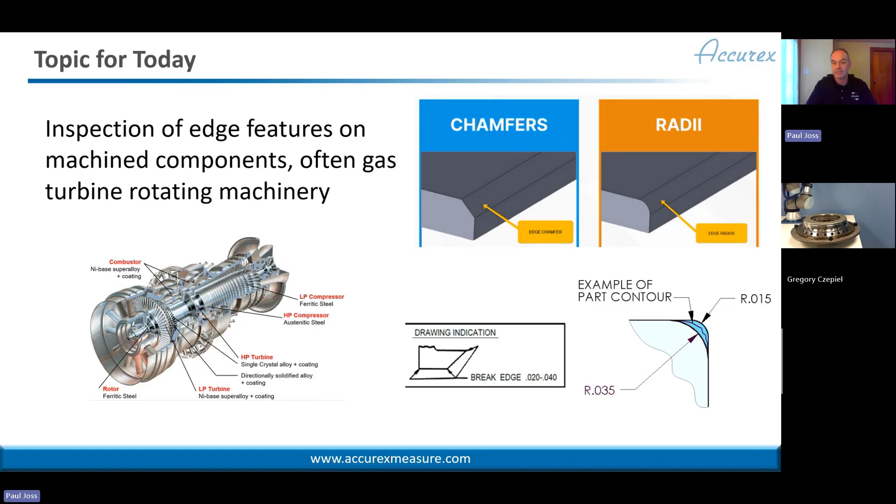And our topic today is a very specific one. We're going to look at the utilization of GapGun technology for inspecting small edge features on precision machine components, which in our world usually means the rotating components of gas turbine machinery, but not exclusively, really. Anybody who's doing precision machining that's having to do edge treatments like chamfers and radii, or even just deburring an edge to break an edge, for reducing stress concentrations and for safety and for fit and function, will find this relevant.

So that's our topic today. We're going to try to keep it tight right at 30 minutes or under, so I'll apologize in advance for talking too quickly, which I tend to do naturally anyways. But our agenda is pretty straightforward. I'm going to do a brief overview of the GapGun technology and the application. Then we're going to turn it over to Greg. He's going to demonstrate both the handheld and the automated versions of implementing our technology for this particular application, and then we're going to wrap it up with a little Q&A at the end.

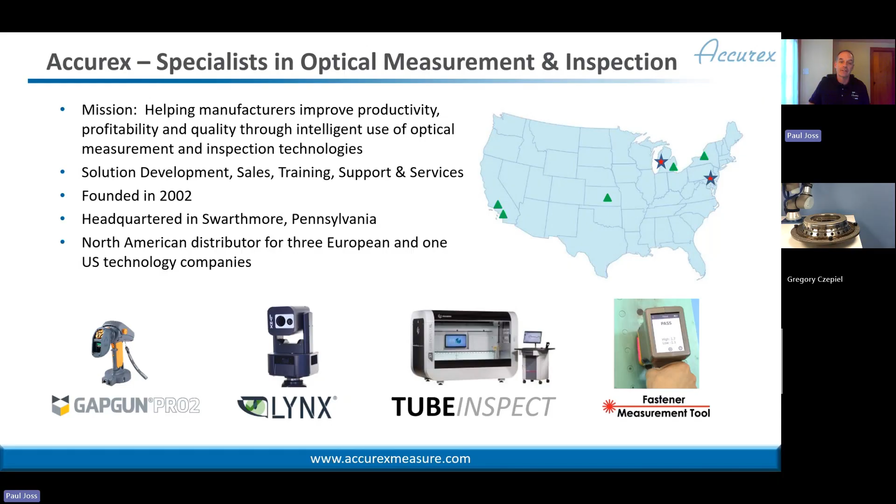We work with the Tube Inspect system, which is an optical gauge for formed tubes and wires. So people doing CNC tube bending of things like brake lines and fuel lines in aircraft or bus bars for electric vehicles. These things have to be controlled, and our tools work with that. And then we also work with the fastener measurement tool, which is really a purpose-built handheld 3D scanner focused on countersink and fastener flushness measurement, primarily on aircraft. Okay, so those are the little niches in which we operate.

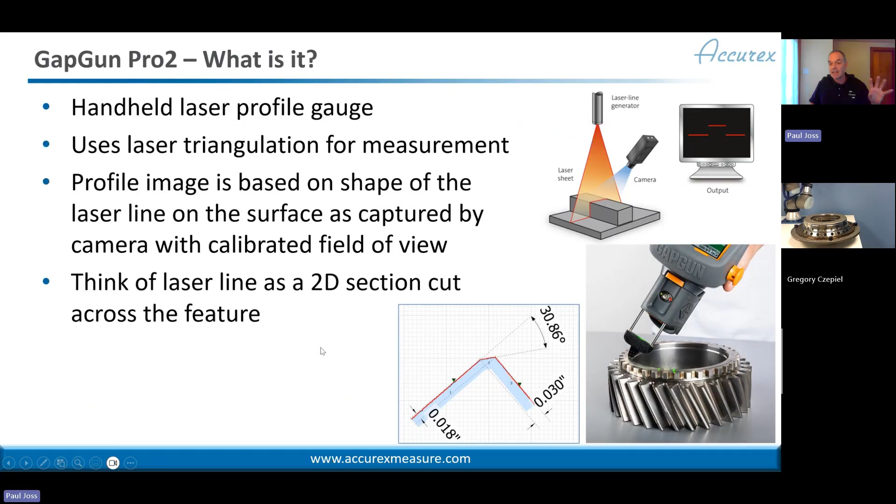So that's kind of the basic principle of the GapGun, and its reason for existing is that the GapGun is here to replace older methods of performing these types of gauging. Anybody who's producing these types of machine components and making these edge treatments has got to do some sort of control, either using hand tools or coordinate measuring machines or optical comparators, or a number of different ways. What the GapGun offers is a very fast, very accurate, super easy way of making these inspections right there on the shop floor where the production is being done.

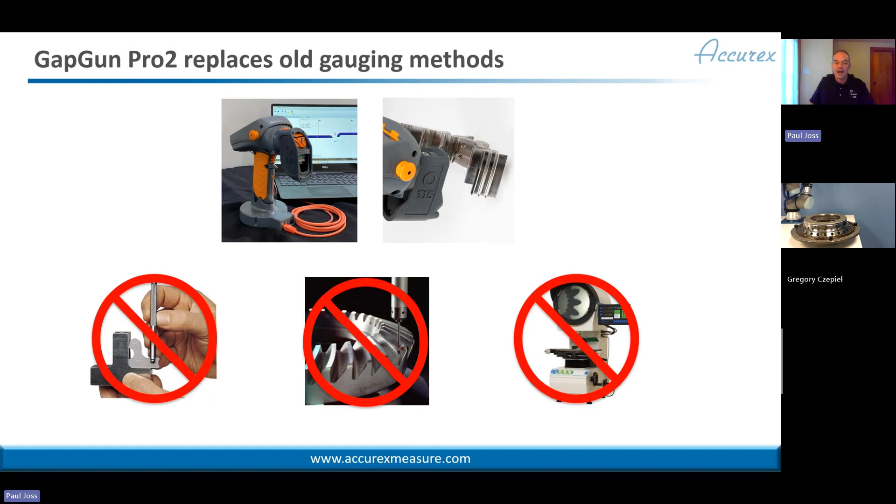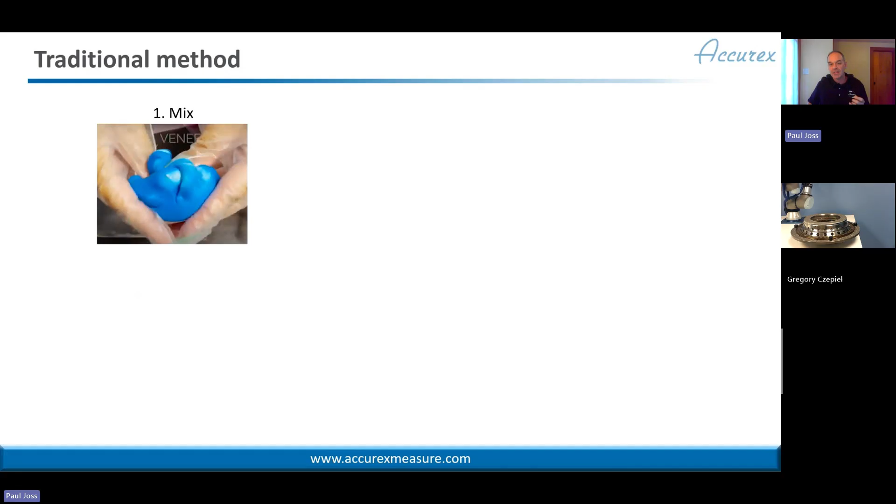So if we're not replacing these methods, we're at least offloading a tremendous amount of the work onto the GapGun to do it more efficiently. As a point of comparison, a lot of places we go into to talk about the GapGun are doing what we call the cast and compare method, where they're mixing up a compound, kind of like a repro rubber type of compound, so it'll start curing. They place it onto the features they want to measure and let it harden. Once it hardens, you peel that back off and slice it, because now it's going to represent the shape.

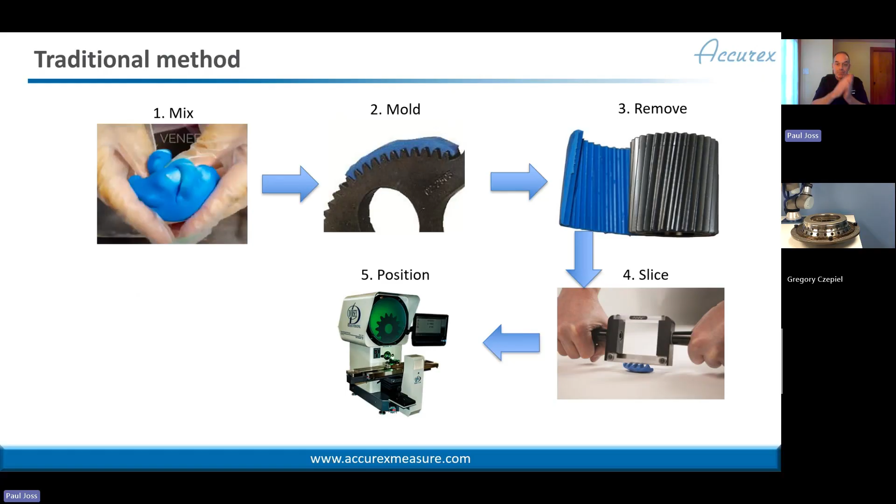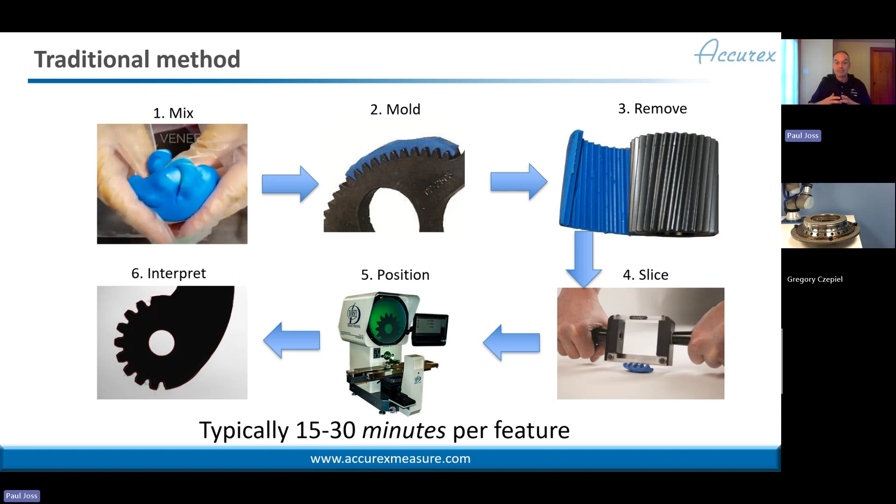You're going to slice that, take that little 2D slice, put it on an optical comparator, and on there you can extract the dimensions you want, whether it's using the software built into the optical comparator or a typical template type of approach. It's not a bad way of doing it, it's well proven, but it tends to be fairly slow. You're looking at 15 to 30 minutes per feature. And on a typical turbine disk, you're going to have dozens of things to check, so it becomes a bit of a bottleneck.

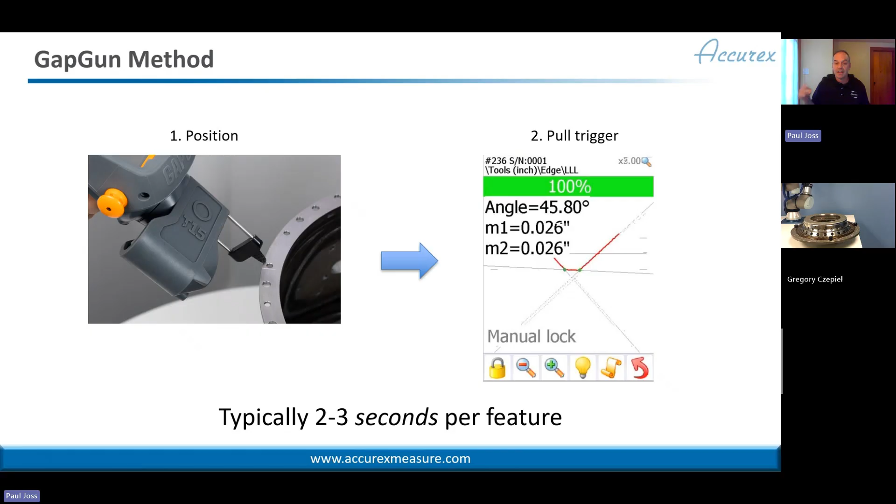GapGun turns that on its head and has a very simple two-step process for performing this inspection. You position the GapGun, you pull the trigger, and within 2 to 3 seconds, you've got your answer. In this case, we're looking at the screen of the GapGun. Right there, the operator is seeing the chamfer measurement, the leg lengths and the angle, and whether it's in tolerance or not, that quickly. So that's really what the GapGun brings to the table.

When customers are looking at transitioning from the traditional methods to the GapGun, their motivations are some combination of these 3 factors. First and foremost is usually speed. Because the GapGun is so fast, I can either do more inspections, inspect more parts or a larger number of features, or I can do the same inspections a lot faster to improve my productivity and eliminate the inspection as a bottleneck in the process. So speed is number 1.

But number 2 is confidence. The beautiful thing with the GapGun is that a lot of times in life, if you're going to do something faster, you have to trade off quality to get that speed. With the GapGun, you don't have to do that. We're measuring much faster, but we also have ways built into how we measure to ensure high confidence in those results. First, when we have this profile, we specify exactly how I want to extract the measurement. In this case, we fit a couple lines and fit a radius to the arc between those to come up with that radius measurement.

So you can specify how you want to make that measurement, so it's done the same way, no matter who pulls the trigger. Secondly, when we make a measurement with the GapGun, it's not just a single measurement. We actually pull the trigger.

We're taking multiple images, say 6 sets of images, performing that inspection independently, performing statistical analysis, and then giving you a composite, an average result of those all in those couple of seconds. So it's as if you did that optical comparator thing, say 6 times through, is what you're getting with the GapGun in just a couple of seconds.

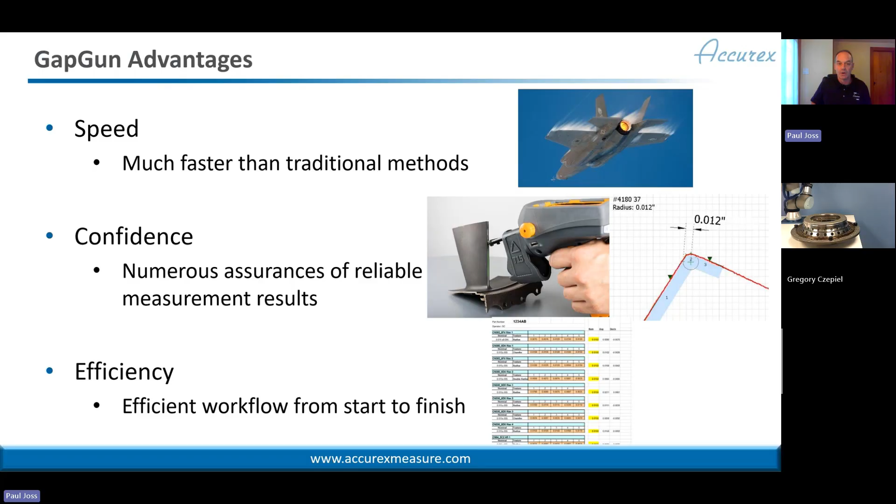And when you're finished, you can just simply transfer that data back to the host computer and put it into your ecosystem, whether that means the quality management system or Excel reports or anything like that. So that's what you get with the GapGun.

The GapGun Pro2 packaging is really, really designed to be efficient, ergonomic shop floor measurement. So it starts with the namesake pistol grip with the trigger for making the measurements. A simple pull of the trigger. This T15 sensor we have on the end is a very high resolution sensor that we've got just over a ½ stripe with over 2,000 pixels in there, where we're able to get very high resolution imaging on the features we're looking at. You can use the GapGun with the sensor attached or with the extension cable as shown here.

There's the color touchscreen interface for the user. So just everything built to make operators want to use this thing on the shop floor, and it's all done with an ISO 17025 certification. So the GapGun is coming with that out of the box, so you can be confident in the measurement results.

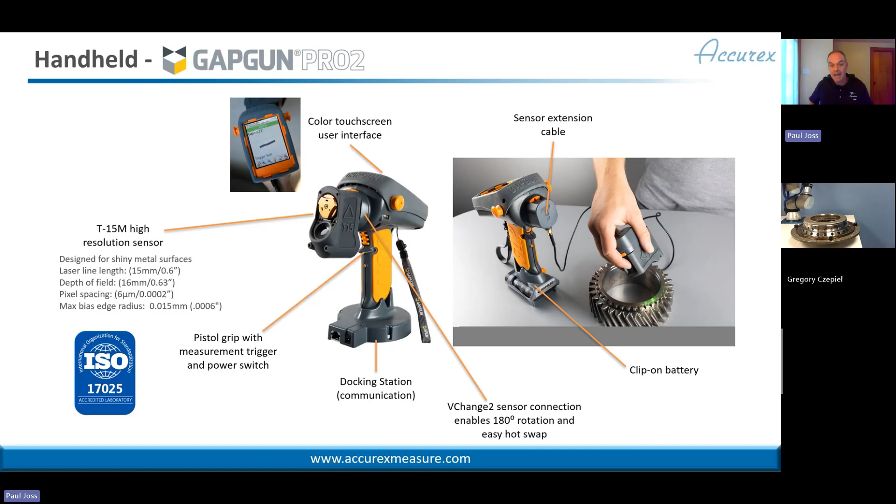When we look at automating the GapGun, we really use those same components, the same sensing, the same processing. We just have ditched the pistol grip, and we're going to mount this to a robot. So we're going to take the sensor, place it on a robot, and this is for applications where I'm going to be inspecting it at a high frequency. Maybe I've got to inspect the same part again and again all day long. Or maybe I've just got the tightest tolerance. I want to make sure I'm getting the highest level of repeatability.

So that's what the Vectro entails. We just automate the process. The measurement itself is the same, but running it is as simple as hit the button and tell what to inspect, and the robot will do the work. We've got plugins for both FANUC and UR cobots, and it can also be integrated with just traditional industrial robots.

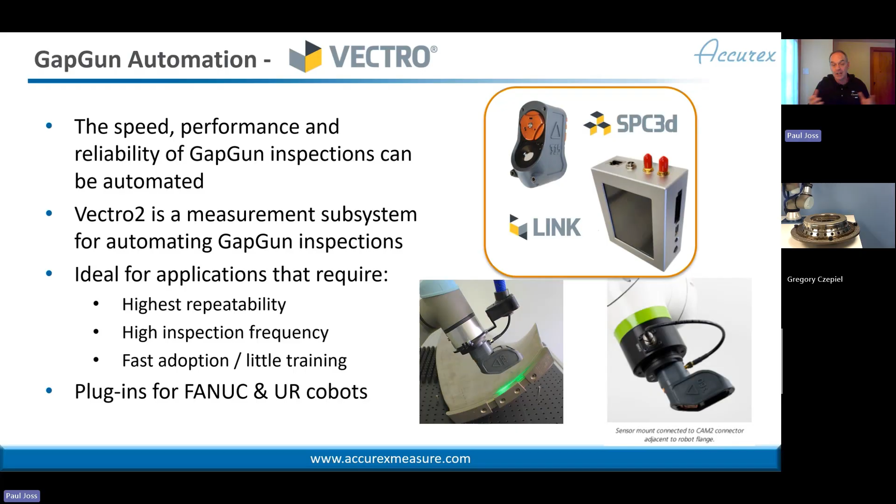Okay, so the last thing I want to mention before I turn over to Greg is that, in addition to the hardware packaging, on the software side, there's some real power within the GapGun software to make sure that, as I said, you can rely on these measurements as rock solid. So this software is called SPC3d. This is the management software of the GapGun. So it's not something that operators are using on a daily basis, but this is how I specify.

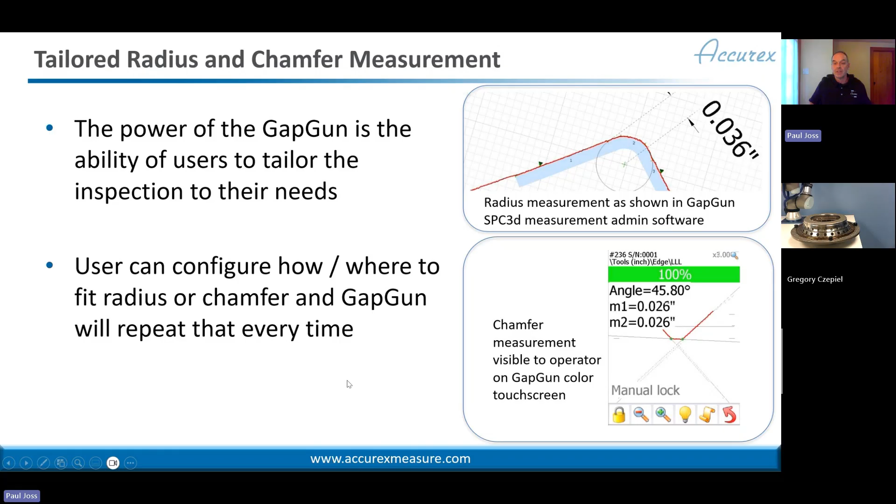How do I want to measure? I want to fit a line. I want to fit a line. I want to fit the radius between it. So I'm going to fit these mathematical primitives to the laser line, and I define how to do it so that it happens the same way every time, very repeatably. Same thing with a chamfer down here. I can specify how I want to fit lines to it, how I want to extract the angles, and which sections of the line I want to use for that measurement. So very, very robust for that type of measurement.

But there are some features, as I mentioned earlier, where you're just deburring an edge. It may not be a real radius or a chamfer, it just is not a sharp edge anymore. So we need to be able to check that as well. So instead of trying to fit a radius to it or a chamfer, we just say, hey, does it fall within the maximum zone?

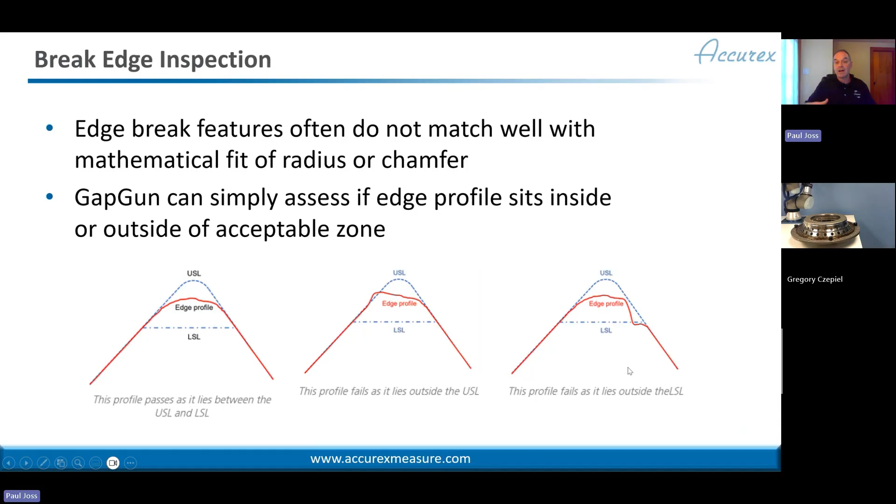So you've got these upper spec limit and lower spec limit, which could be a line or it could be a radius. And basically, if the profile fits between there, it's good to go. We pass. If it's outside for any reason, maybe there's some overhang, maybe it's got a bit of a gouge in it, then that's going to fail, and the GapGun's going to detect that in the inspection.

Okay, and within the software, we've got these tools, edge break tools, that really allow us to define these regions of interest, to set up profiles to eliminate the potential for false negatives. So really, all the tools in the software are built in to make sure that when I'm using this for these edge features, I'm getting very, very robust and reliable measurements.

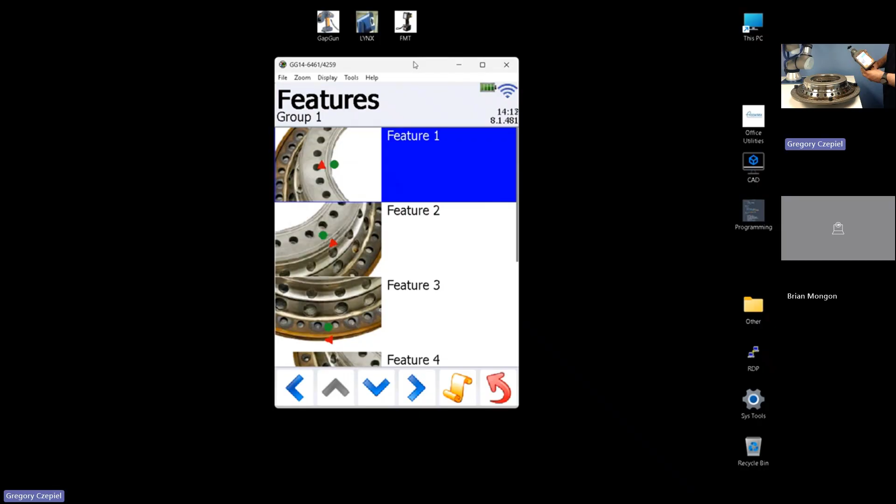What you're seeing on the screen is what I'm seeing live on my PDA screen of the GapGun Pro2. The camera is obviously a live view of what I'm going to measure. We're going to take 10 measurements today of this engine casing, 5 with the handheld GapGun Pro2 data collector, and 5 additional different measurements with the AccuCheck Vectro 2 system with the T15 sensor.

So I have a carbon fiber tip attached. The sensor doesn't know if the tip is attached. It's used as a guide. I'm going to pull this trigger, and my violet laser with 2,500 data points is live, and you'll see I'm best fitting a radius into that concave area. And the sound and the green bar indicate that I was in spec to the upper and lower spec limit shown in parentheses.

My next feature, I'm going to pull the trigger, is a break edge, in which I'm not only trying to best fit a radius, but I'm showing what's above and below the spec limit CAD lines. Not sure if you heard it, but there's a different audible tone, and it's showing we do have data above the upper spec limit for that measurement.

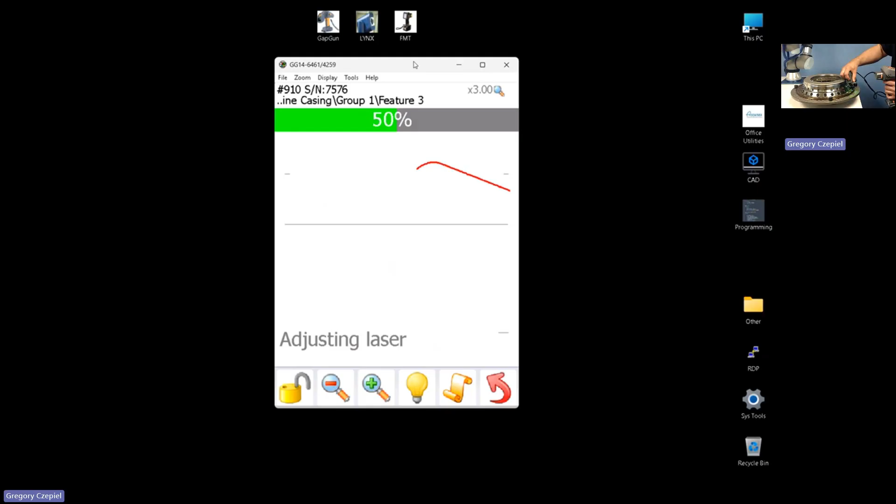So now I'm going to switch over with the head extension cable. The cable allows me to get into more confined regions, or it also allows me to more easily see where I want to measure. So it's a quick disconnect, can be hot plugged. You'll notice there's also, in addition to the trigger, a button that I can press that acts like the trigger that initiates the measurement. So I'm going to measure this feature here, which is actually a compound feature.

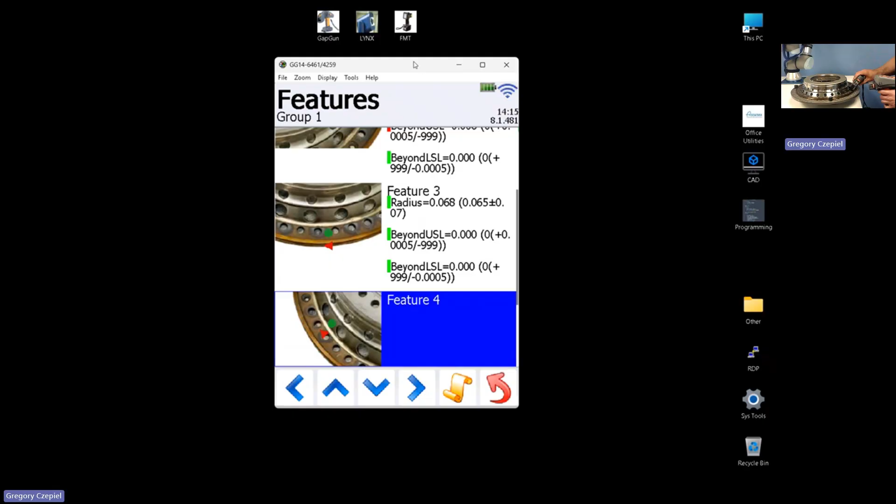The T15 longer laser line allows me not only to pick up the radius, but also we're best fitting a chamfer 3-line fit. And just like we did for the previous radius, we're showing any data that's above or below the upper or lower spec limits. That larger laser line also allows me to pick larger features. For instance, this radius, which measures almost about a 1/4 inch.

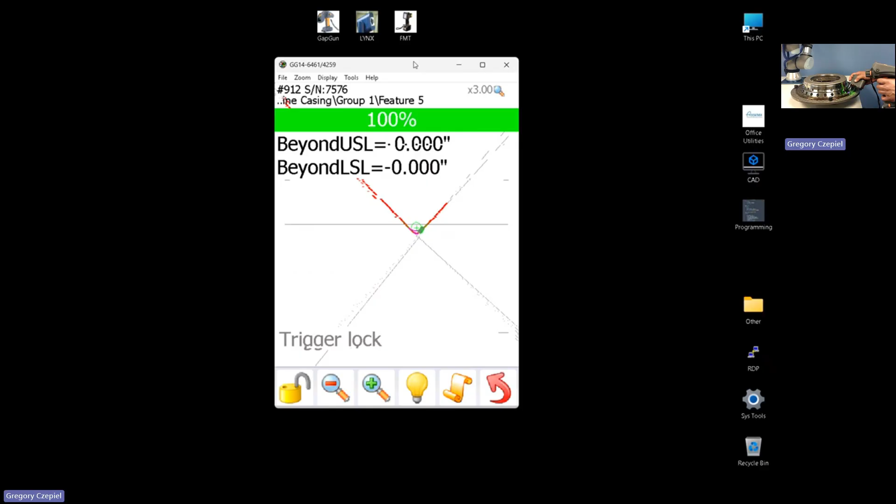For our final feature, we have another break edge. There's a series of holes that surround this part, and we're going to measure this very small break edge here. And we're not looking at the radius, but we're looking at any data that fits above or below.

Because I'm set up wirelessly right now, we can actually upload this data without plugging anything in, and we get a summary beforehand that's showing what was measured, what was in and out of spec. And if I pull the trigger again, I can upload this data, which you'll see momentarily will automatically generate 2 reports.

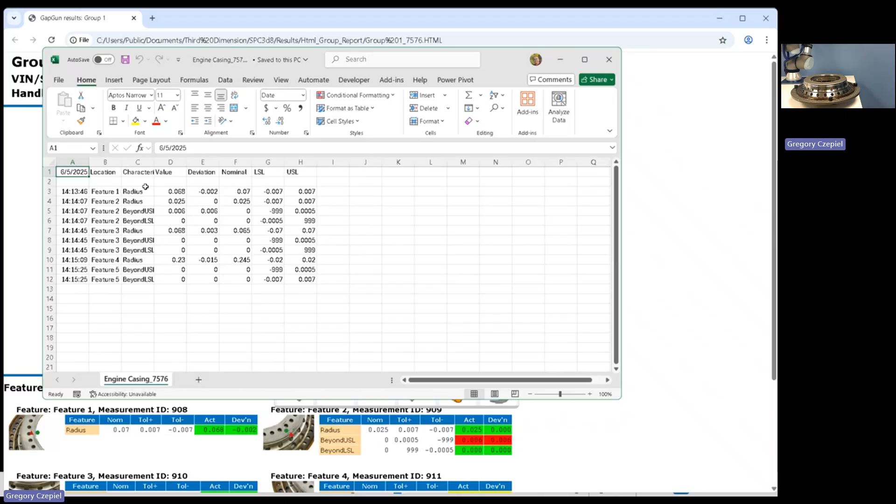The first report is an Excel report, very simply made. It's showing where we measured, as well as the characteristic for that measurement, the value, and the deviation from nominal. The second report is a more graphical view. It's showing not only where was in and out of spec, but also where that measurement was collected and how the sensor was positioned across that feature, indicated in the circle and triangle.

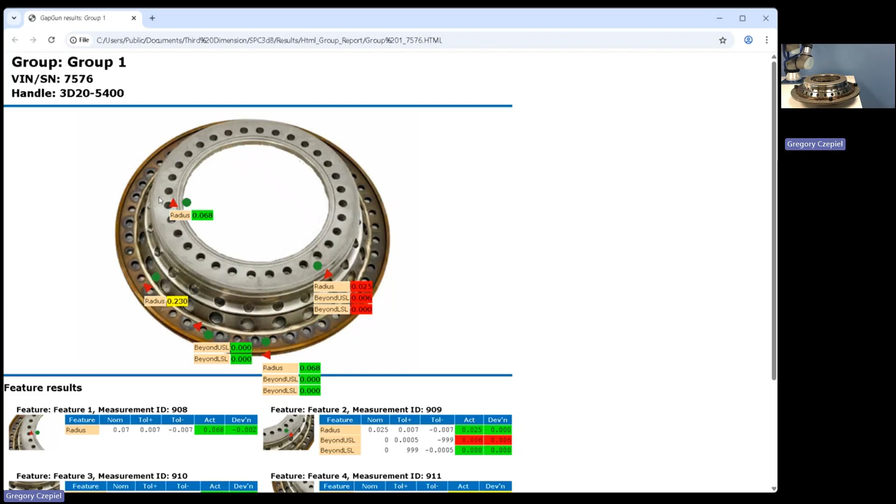In reality, we can upload the data to any textual-based, ASCII-based format. And that's one thing AccuRex does provide as a service when the system is sold. In addition to getting the report, we can also, as a diagnostic stage, maybe we want to find out why that measurement was 69 thou, we can open up SPC 3D and view each one of those profiles. So the profile here was 69 thou.

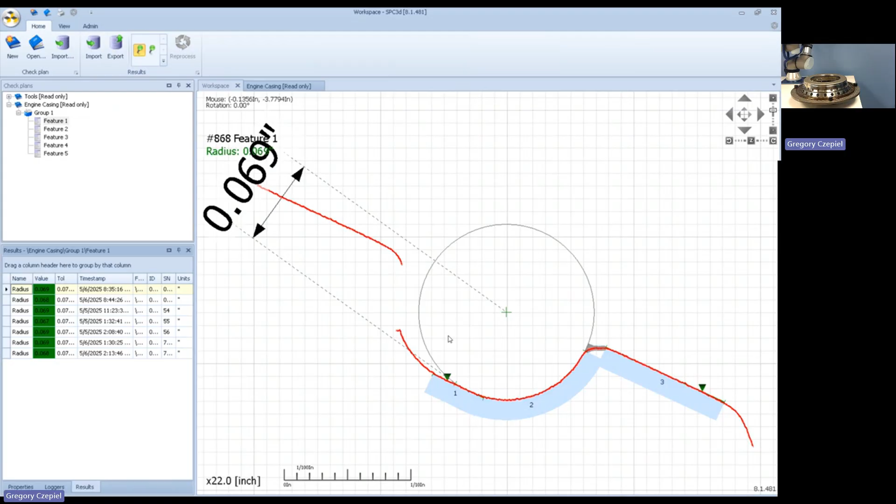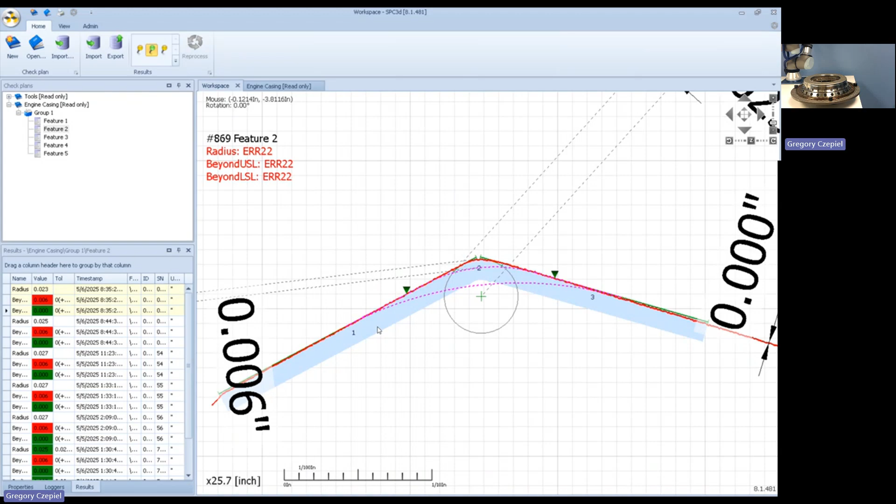We're in spec. We have another measurement here that we're showing that was measured out of spec. Here's our CAD lines. So we're showing data that were 0.006 of an inch above the upper spec limit. So these purple lines indicate a boundary. So we expect all the data, the digitized data, by the way, the gray, just like the blue here, represents the material side, must be in spec, has to fit between these upper and lower boundaries.

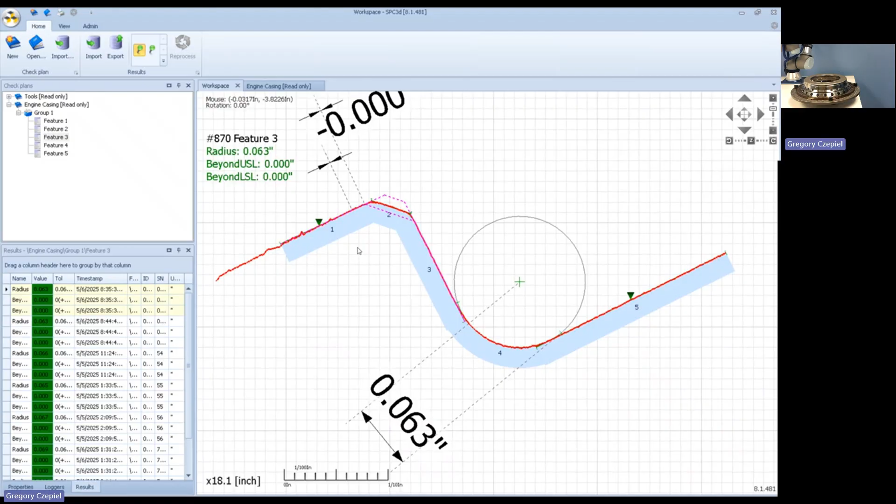That longer laser line, the newest generation, also allows us to measure a couple of features together. We have a radius, and to the left of that, we're looking at the boundary lines of the chamfer and our larger radius. And our final feature for the handheld measurements was a break edge feature again, where, this one is obviously in spec, but we want to make sure all of our edges fit into this confined region, which we can define in a region of interest and a buffer zone.

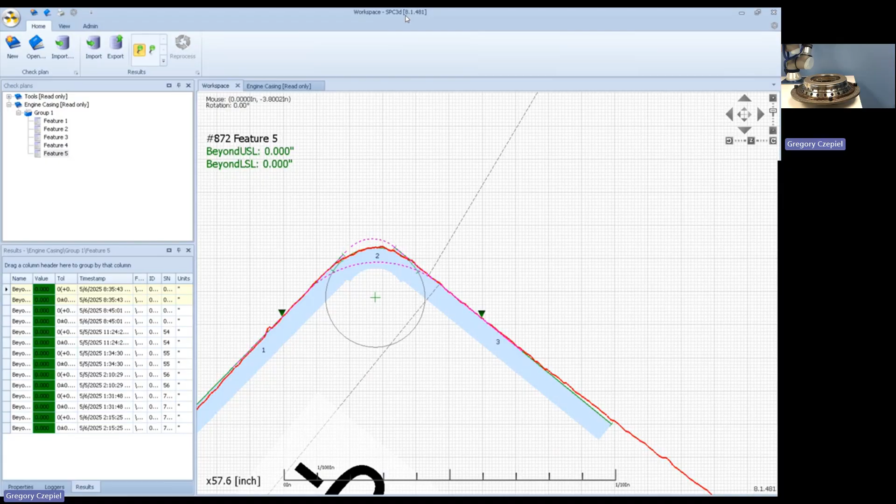So for the next part, I'm actually going to stop sharing momentarily here, and we're going to disable the camera momentarily. We're going to reset our configuration and move into measuring with the Accurex, which is a homegrown solution, software and hardware, using a universal robot to automatically collect the break edge measurements. So let me just give us a quick moment here.

So while Greg's doing that, I'll just reiterate what he mentioned earlier, is that the data transfer, if you perform measurements on the GapGun and you want to put those into your quality system, whatever that may be, that process can be customized. So the graphical and the textual examples they show were just to show that you upload data and that happens automatically. But again, that can be custom tailored depending on the needs of a given environment. And the same with the SPC 3D software, that's kind of the administrative tool, but it's really powerful not only for the data transfer, but for configuring inspection plans.

So it wasn't really that evident on the GapGun when we were going through it, but you can set up essentially little work instructions on the GapGun that will step through. You may have 50, 100 places you want to inspect on a part, and the GapGun will just step through and say, okay, measure here, then measure there. You can have a picture showing where you're measuring. Each inspection point can be tailored as needed. So a lot of power in making sure that it's set up and doing exactly what you want.

All right, Greg, I'll shut up now.

Oh, no worries. So now what you see live in your camera view is the UR5e robot with the T15 sensor as an end effector. And what you see in the shared screen here is the Accurex software, developed in-house as a solution to use the automated rotary stage, the robot, and the T15 to collect break edge or gap and flush measurements. So I'm going to pick my part here, and I'm going to define a serial number, similar to what we would do with the handheld.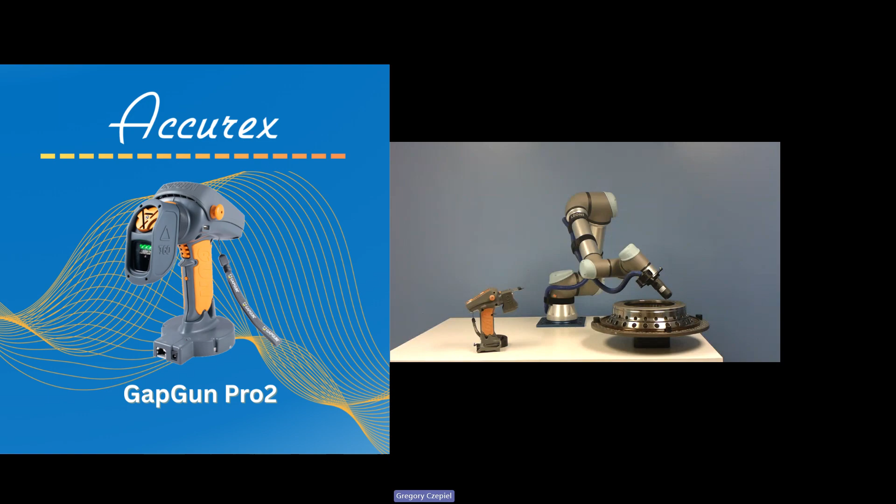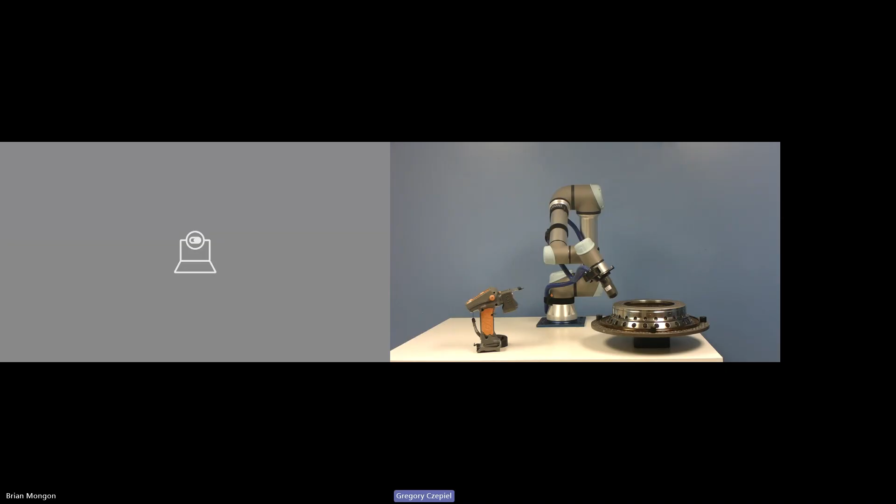I'm not sure if you heard, Greg, I don't see your screen share for the robot here. I apologize. Thank you, Paul. So we're actually on the 3rd measurement already. I apologize for that. But on the left-hand side, you see the profile being collected.

The upper right-hand side is the inline view. That's showing where that data was collected in a conditional format, pass or fail against a given set of tolerances. In the bottom right, we see previous runs of that data collection, also conditionally formatted. And you can see we have various features here.

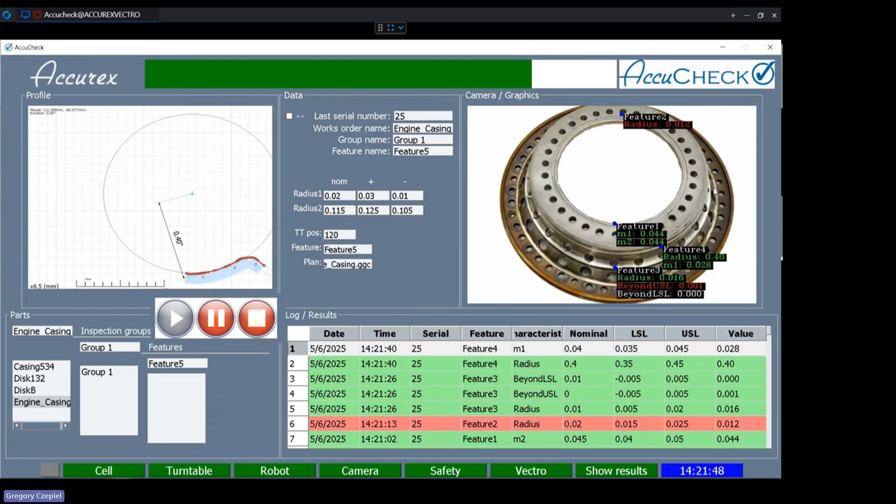Feature 3 was a break edge where we're looking at the radius and the upper and lower spec limit. Feature 1 was a chamfer. Feature 4 was a combination of a chamfer and a radius. And you can see here, this was a double radius, an S-shaped curve, in which we're measuring a small radius and a larger radius. Our smaller radius was 21 thou and our larger one was 116, both of those in spec.

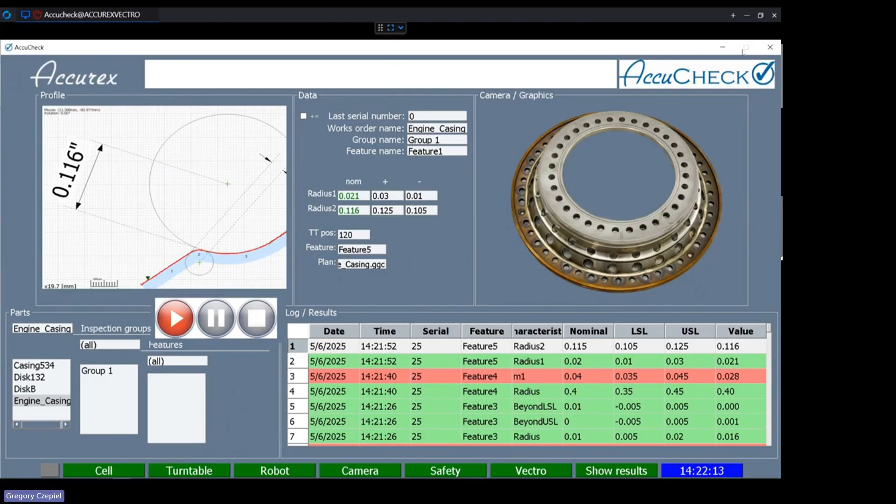Now that that's complete, we can run a different part, or we can go into SPC 3D, just like we did with the handheld, and view the results. That data can be sent, again, to Excel. It can be sent to a PDF, various formats. But what we'll see, similar to before, is we have a chamfer measurement here. We're measuring the leg length on the left and the leg length on the right. They happen to be symmetrical in this case.

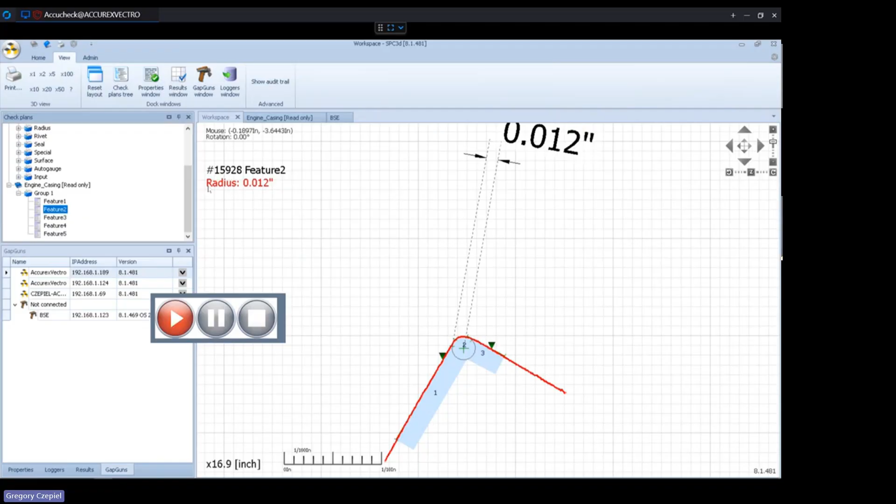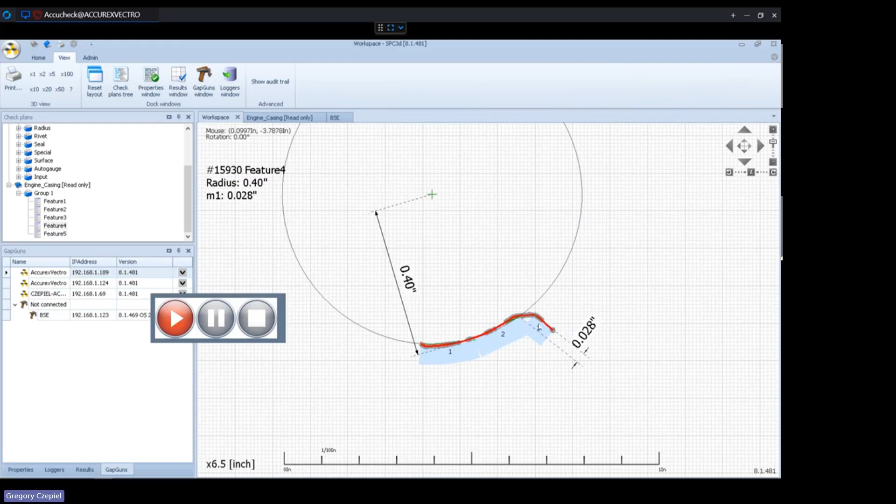Our radius was smaller than nominal. I think we were expecting a 20 thou. We got an audible tone and it's indicated in red, as it was with the AccuCheck software. And for our upper and lower spec limit, we're very slightly above that upper spec limit here for that small radius edge surface. And we have another feature that's a compound feature with a larger radius and a small leg length on the right-hand side of that chamfer. And we just saw this final feature here.

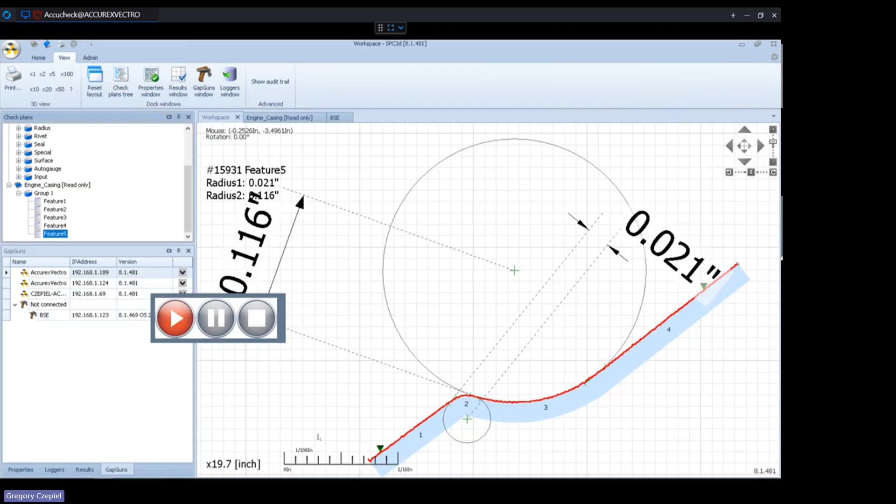So with this software, like Paul had mentioned earlier, we can mask out where we want to collect the data, where we want to inspect the data, set our upper and lower spec limits, define our features, and define our graphical information to the operator who's inspecting the part as well. And that pretty much concludes the live demonstration.

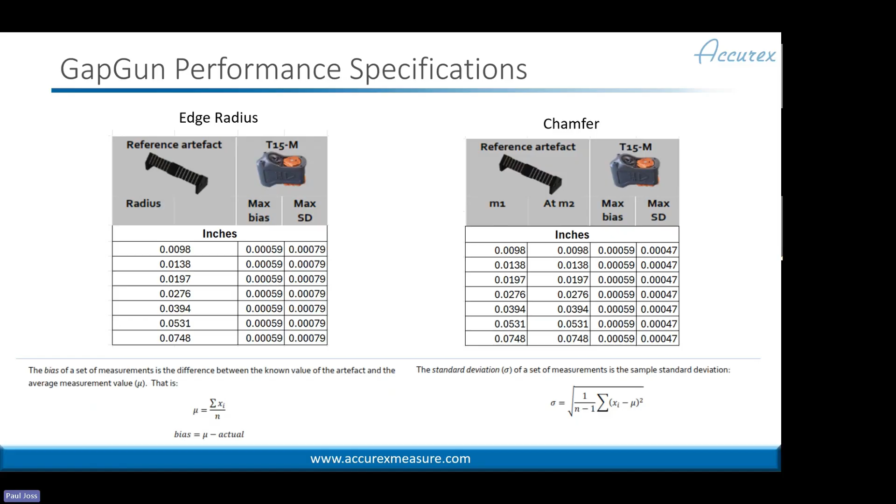Or, excuse me, not 6 thou. Excuse me, 6/10. That's an important difference there. Yeah, there you go. So 0.0006, 6/10 thou for the GapGun. And again, that's specified performance. And the important thing is that it can really be configured very tightly and flexibly to handle all the different types of things that people are going to encounter. So I'm going to stop sharing this and see if there's anything else in the Q&A.

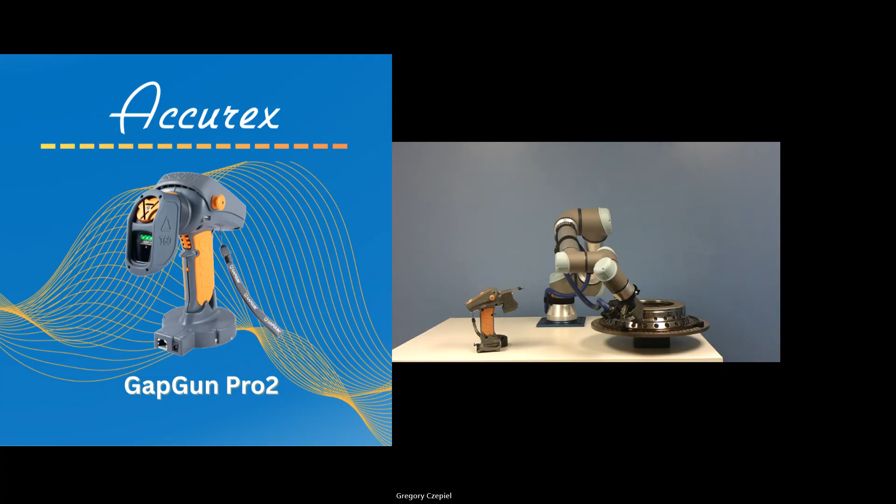Okay. So there's a question, can the GapGun do gap and flush? That is a very good question. Yes, that is in fact the genesis of the name of the GapGun. So yes, the GapGun does do gap and flush measurement. It's just a simple matter of interpreting that laser line a little bit differently. So within the GapGun, you've got what we call a whole set of tools, which are the algorithms for how it interprets the line.

So you've got some for chamfer, some for radii, but you can also measure gaps and steps and mismatches and, you know, a host of other things that you can pick up from that profile.

So question, does the use of the cobot increase accuracy? It's a good question as well. It doesn't increase the accuracy of the measurement, but it can increase the repeatability. Okay, so the only variable of the operator really is when they position that GapGun, how are they oriented at the feature, and are they stable, right?

So with the robot, it's going to go back to that same place every time. You can even see that there's the turntable being moved. So between the turntable and the robot, we can make sure that the sensor orientation to the part is very consistent. So that really helps with our repeatability of the measurement.

Smallest arc radius the system can measure. This is a question that's dangerously close to launching into my long speech about radius measurement in general. But so we can extract a radius measurement; there's not really a limit in terms of the size of the arc, but the problem is from a metrology standpoint, there is, right? So if you start talking about an arc of 10 degrees, then there's just not enough there mathematically to get a good repeatable radius measurement.